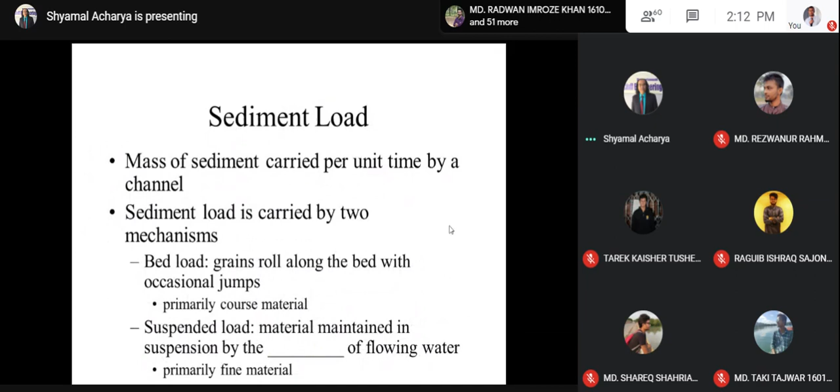Suspended load consists of clay particles or finer materials maintained in suspension by the eddies of flowing water, the eddy current of flowing water. You might know about this term, eddy current. Suspended load is sediment suspended by fluid turbulence, remaining in suspension due to fluid turbulence.

Concentration can be substantial in cases of high flows and fine sediment, up to 60% by weight. This relates to the vertical distribution of sediment.

Where you can see most of the sedimentation in flowing water through irrigation canals: there is higher concentration near the bottom of the canal. Coarse fraction concentration decreases rapidly above the bed, while fine fraction concentration remains more or less uniform from the bottom to the top of the water. Fine fractions remain more or less uniform, but coarse fractions remain much more concentrated at the bottom of the canal, decreasing rapidly as you go upward.

There is no theory for concentration at the interface with the bed. Given sediment concentration at one elevation above the bed, it is possible to derive sediment concentration as a function of depth.

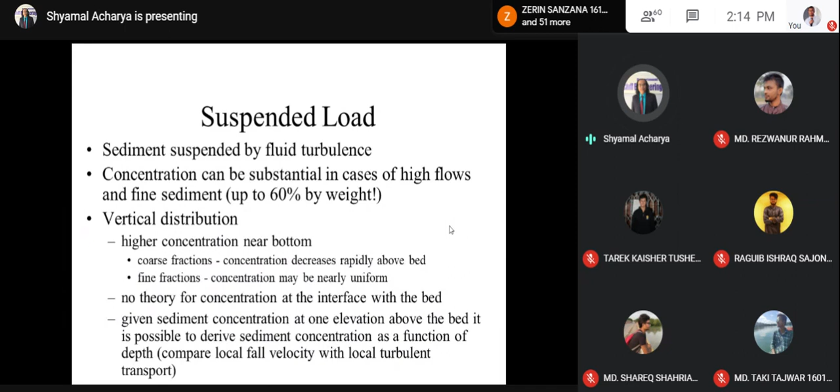So you can consider sediment concentration depending on the elevation, and derive a sediment concentration as a function of depth. So you can say that as depth increases from the surface of the water, concentration will be increasing. You can establish a relationship between these.

Bed load depends on sediment size distribution. The bigger the size of the particle, the more will be on the bed. It also depends on the bed shape, the shape of the channel bed, whether there are ripples or dunes, then sediment density, and also shear stress at the bed.

Many researchers have proposed bed load equations, but each equation only applies to the data that was used to obtain it. So you can find many equations, but not all are applicable to all types. For a particular category, you use a particular equation. So you may depend on an equation, but you need to be careful about the channel characteristics and what type of experiment the equation was obtained from. You need to use those carefully.

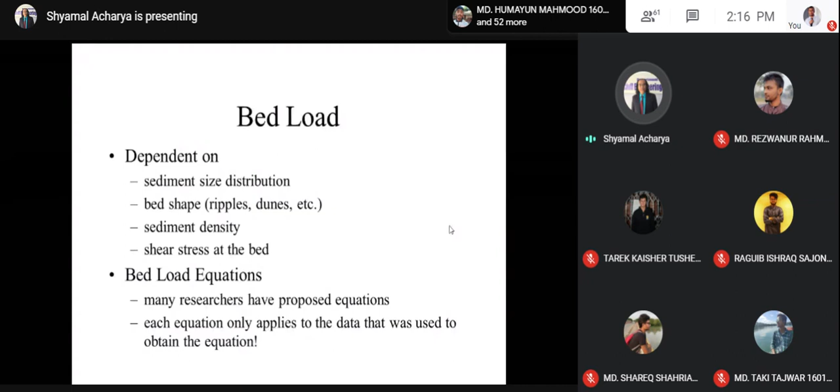Bed formation: a variety of bed forms are possible.

Bed forms could be different types. They may be three-dimensional, and may vary greatly across the river or in the direction of flow. For a river, bed formation can change quickly, but in irrigation canals or smaller canals, it may remain more or less the same, depending on the Froude number and affect roughness.

Bed forms result from scour and deposition. Whatever the bed is available today, after few days or some time, the bed formation may not remain the same. Depending on the water flow and its characteristics, there may be scour and there may be deposition, and by that way bed forms are susceptible to change from time to time.

Deposition occurs over the crest and scour occurs in the trough.

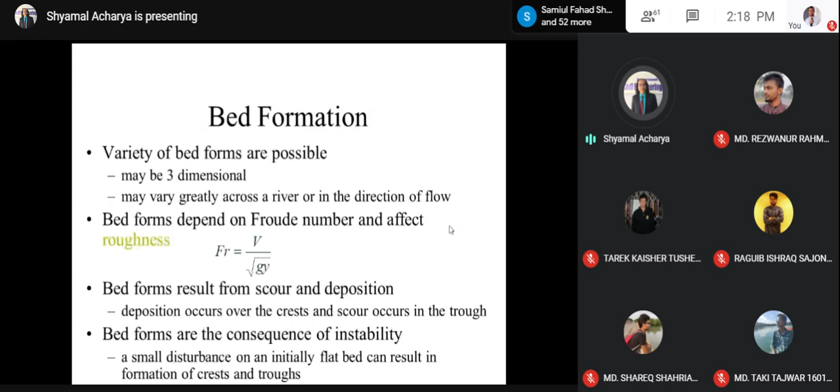Bed forms are the consequence of instability. A small disturbance on an initially flat bed can result in formation of crest and trough. So if there is any type of disturbance because of high flow velocity, because of any other formation, because of any obstruction, the bed, if initially flat, may change into crests and troughs, and ultimately there are possibilities of having some ripples and dunes there.

So just to know about the bed forms: the blue color is the water, and the bottom, smaller dotted areas are the sandy formation of the bed. Low velocity, fine sediment, sand wave moves downstream, wavelength less than 15 centimeters - those are the ripples.

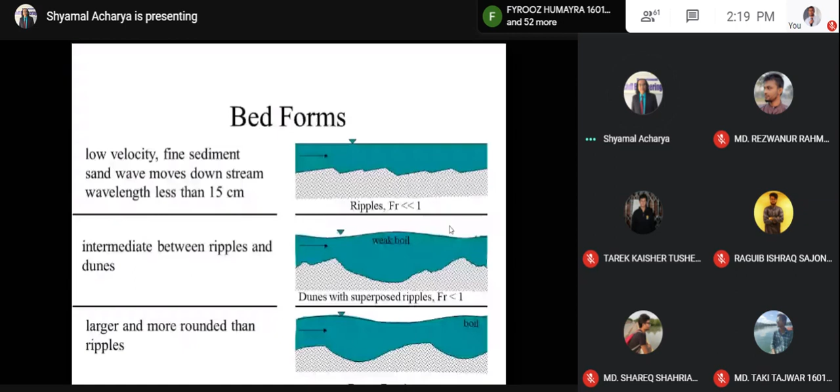But intermediate between ripples and dunes, there are possibilities of having huge dunes, larger and more rounded than ripples. So a perfect dune you can see at the bottom, and at the surface of the water you can see the longer waves of the water flowing. So the top surface of water is also not stable - it is having some wavy patterns.

Dunes are eroded at a Froude number close to 1. No reduction in friction factor or Manning's n - it will remain more or less equal.

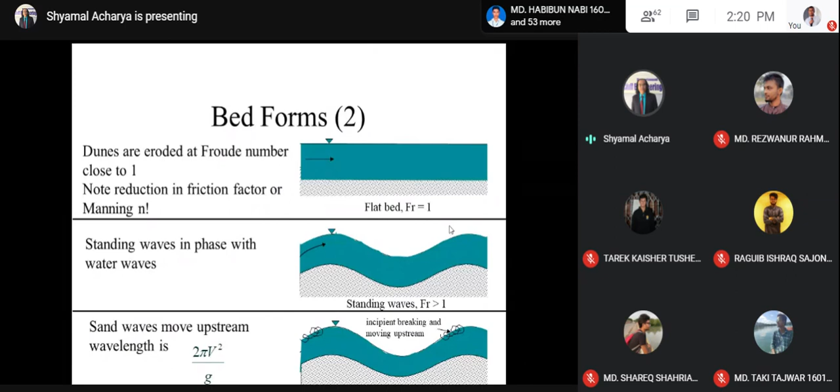And if more waves are coming, in that case there are standing waves in phase with the water waves. Formation of the channel bed will occur in accordance with the water wave, and there will be more swirling on the surface of the water ribbon. Sand waves move upstream with wavelengths having some incipient breaking - those are called the swirlings.

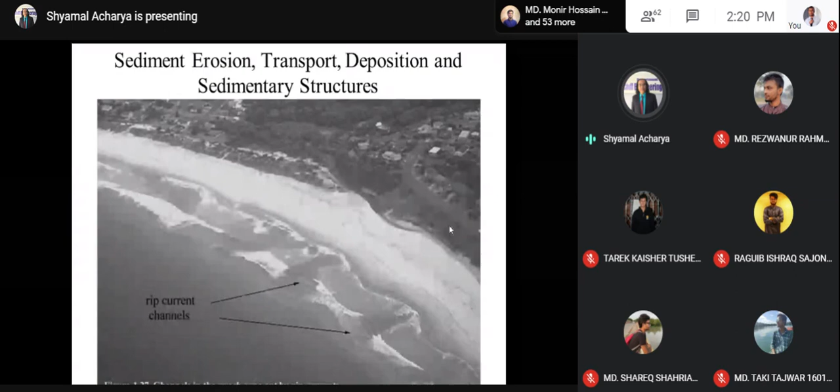Rip current, channels - and we will be coming to know about how erosion, transportation, deposition, and the formation of sedimentary structures occur. Sedimentary cycle: how sedimentation is created and finally goes up to deposition. In between, there will be erosion and transportation. Because of weathering activities, particles will be tracked up.

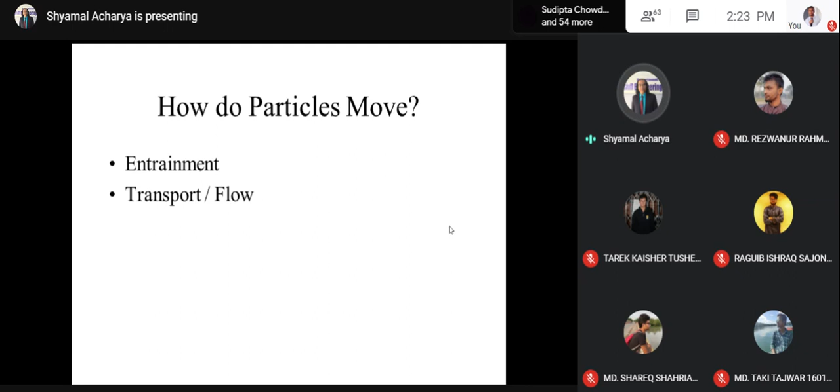In which fashion do particles normally move? Either by entrainment or by transport or flow. The particle moves in downstream direction either by entrainment way or by transport or flow way.

Basic forces acting on a particle - what are the forces acting on a particle? Because of those, the particles are moving in downstream direction. Those forces are basically gravity force, drag force, and lift force. Gravity is attraction towards the center of the earth. Drag is a measure of friction between water and the bottom of the water channel or particles. Lift force is caused by Bernoulli's effect and eddy current or some other way, and those are the forces responsible for the movement of particle by entrainment.

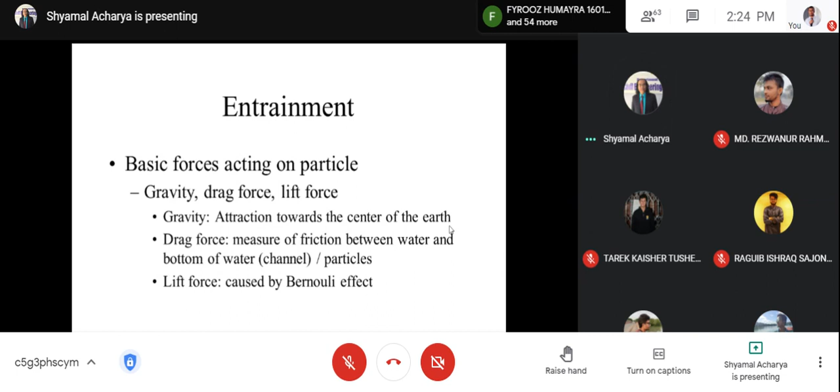You know Bernoulli's equation - three types of energies remain constant at different sections of a river or flowing channel: potential energy, kinetic energy, and pressure energy. Pressure on the grain decreases, creating lift force. Faster current increases the likelihood that gravity, lift, and drag will be positive, and the grain will be picked up, ready to be carried away.

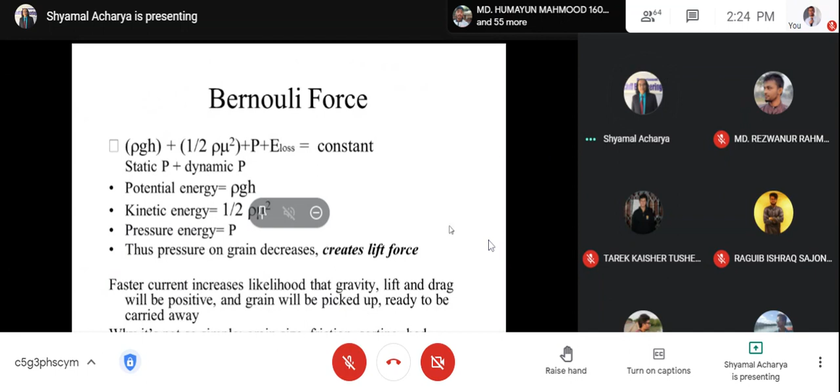Grain size, friction, sorting, bed roughness, electrostatic attraction, cohesion, and because of all those, this movement is not so simple or so easy. As you can see, these types of forces are affecting the particles while they are about to move.

Lift component, Bernoulli's effect, and because of these Bernoulli effects, there could be eddy currents and other energy, potential energy, kinetic energy, and because of this lift component created by the direction of flow, there could be the gravitational attraction on the particle and a lift. It is against the gravitational acceleration, and there may be some other dragging force that reduces the flow of the particle because of the water pressure and because of the friction on the bottom surface of a river or a channel.

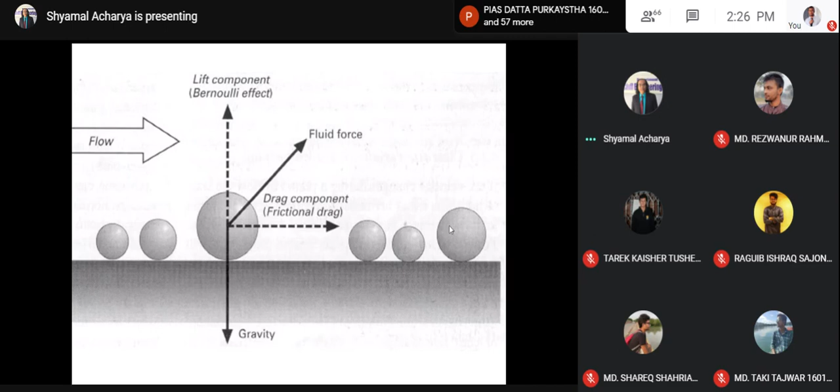So ultimately, whichever one wins, the particle will behave accordingly: whether it will be at rest, whether it will be moving while remaining on the bed, or whether the particle will remain in suspension and move downstream. As you know, the types of flow are laminar and turbulent. In turbulent flow, you can see particles everywhere, and flow lines change constantly, instantly, all the time because of these eddies or swirls.

Why laminar and turbulent? Why are the flows different types? Because of flow velocity, because of the bed roughness, because of the type of fluid. If the fluid type changes, then the type of flow could also change. Because of flow velocity, we can differentiate the type of flow, whether it is laminar or turbulent. And depending on the bed roughness, what type of flow will be there

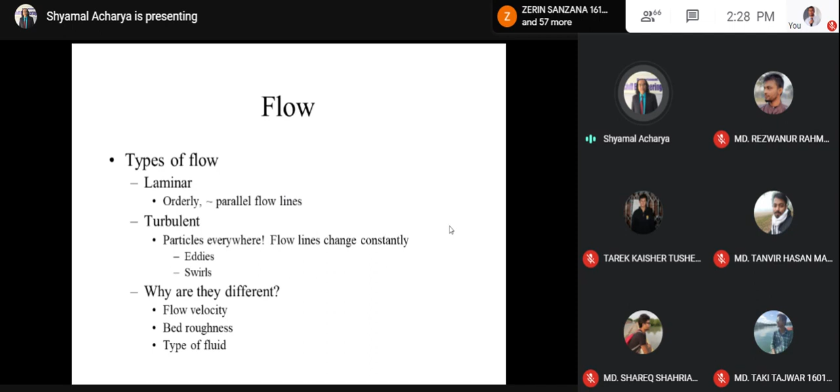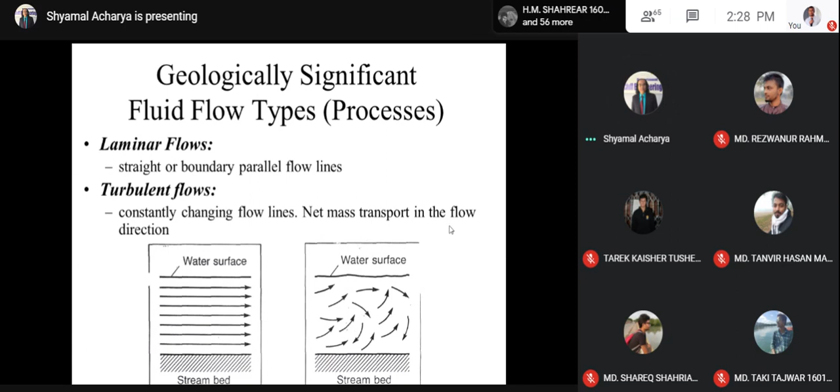could be decided. In the geologically significant fluid flow types and processes: laminar flow and turbulent flow. In laminar flow you can see straight, boundary-parallel flow lines. But in turbulent flow the flow lines are constantly changing. Net mass transport in the flow direction. For each particle, the flow direction could be different, not necessarily in the direction of total movement of the fluid. It could be in any direction.

A fight between inertial and viscous forces. If the water wins these fights, then there will ultimately be flow. Otherwise, stoppage of flow. Inertial and viscous force: an object in motion tends to remain in motion, then something stops it, that is viscous. Slight perturbation in path can have a huge effect, and perfectly straight flow lines are rare. Perturbations, I am not sure whether you know this term or not. The smaller roughness could be called the perturbation.

Viscous force: the object flows in laminar fashion. Because of the viscosity, any object in the flow is liable to move in laminar fashion. Viscosity is resistance to flow. A viscous fluid uses so much energy to move, it's more efficient to resist, so flow is generally straight. Low viscosity, like air, is very easy to flow, harder to resist, so flow is turbulent. So more viscous fluids basically remain in laminar flow condition, low viscous fluids remain turbulent.

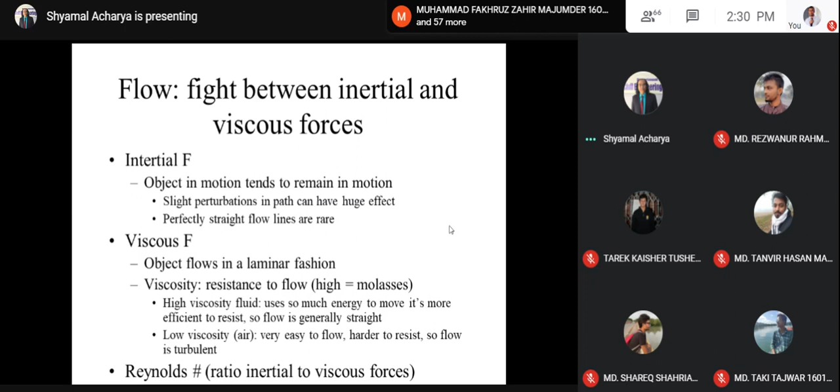Reynolds number, VL divided by nu, where nu equals mu by rho, the kinematic viscosity. You know this equation. Fluids with low nu are turbulent. The change to turbulent is determined experimentally, as we know. Less than 500 is completely and purely laminar flow, and more than 2000 is completely turbulent flow. In between, any type of situation you can see, depending on the segments of flow in the direction of liquid flow. It is flowing like laminar, but sometimes there could be some turbulence effect also.

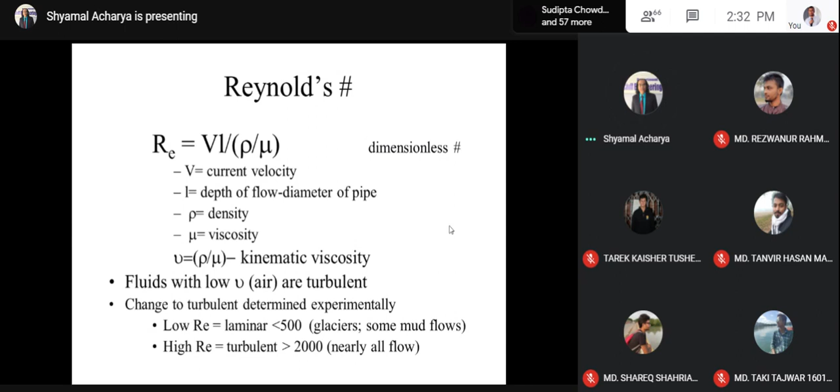So this is more or less a complex situation. So a Reynolds number less than 500 can be said to be completely laminar flow, and more than 2000 completely turbulent; in between is a transitional range. Sometimes it may be laminar, sometimes turbulent.

What else impacts fluid flow? Channels, water depth, and smoothness of the channel surface impact it. Channels of different types: channel type, channel bed, channel roughness, channel width, channel shape, channel situation. All those could impact fluid flow. Water depth can also impact fluid flow. Smoothness of channel surfaces can affect fluid flow. Roughness or smoothness of the channel surface could change the flow from turbulent to laminar or laminar to turbulent, and whether there is any viscous sublayer.

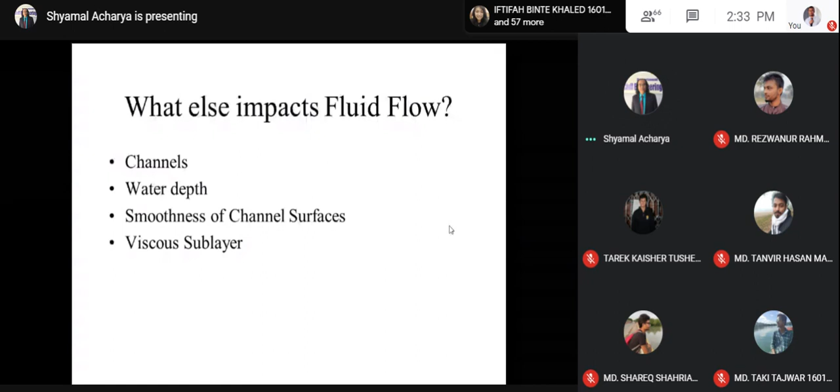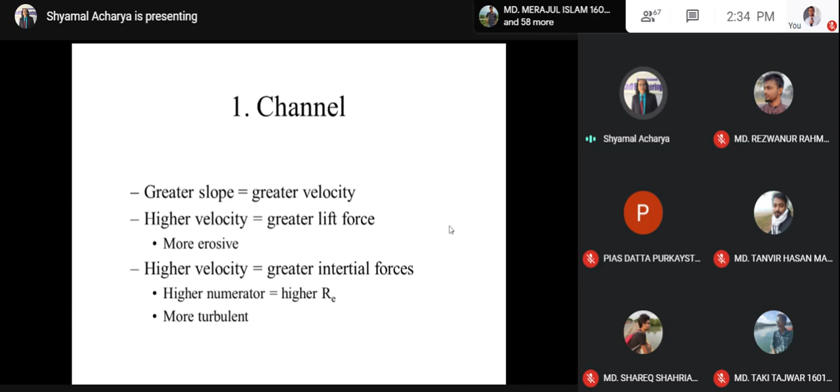Channel. If the channel bed has a greater slope, there could be a greater velocity in the water, so ultimately a possibility of turbulent flow in the channel. Higher velocity will give you a greater lift force. So a greater slope gives high velocity and more chances to be erosive. Greater inertial forces, so a higher Reynolds number, and it could be more turbulent. Water flowing over the bottom creates shear stress, ultimately trying to retard the flow.

Shear stress will be highest at the contact surface and decreases as it moves upward from the channel bed. Velocity is lowest at the contact surface and increases up. Velocity of the water flow is very low at the contact surface of the channel bed, but if you move upward from the channel bed, you can see that the velocity of water is increasing.

Depth over which friction creates a velocity gradient: in shallow water, the entire flow can fall within this interval, and in deep water only the flow near the bed level is retarded. In the case of deep water, the flow velocity more or less remains the same in the total cross-sectional area, but at the bottom level, the flow velocity is bed-level restricted.

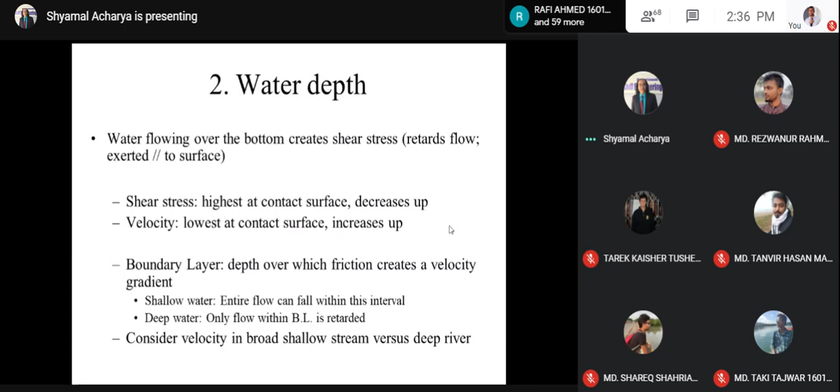Water depth, boundary shear stress: stress that opposes motion of fluid at the bed surface. So from there you will see a particular type of curve. You can see how they will retard the water flow, or their characteristics. The resistance to fluid flow across the bed, the ability of fluid to erode or transport sediment.

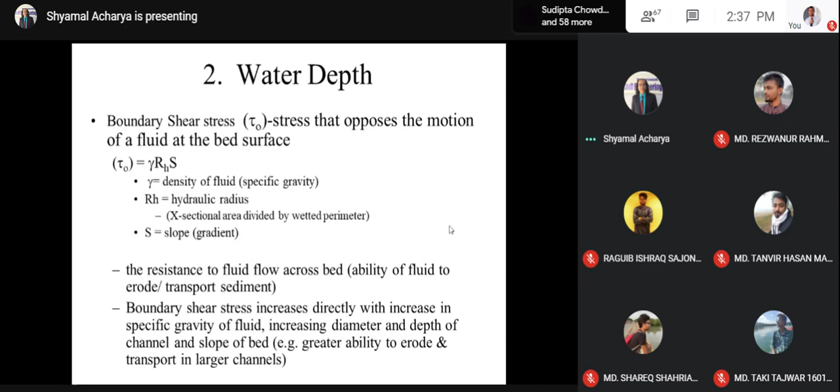Boundary shear stress increases directly with the increase in the specific gravity of fluid, increasing diameter and depth of channel, and slope of bed. So depending on these factors, boundary shear stresses could be increased or decreased. Turbulence moves higher velocity particles closer to the stream bed or channel side, increases drag and lift, and thus erosion.

Turbulence in this flow applies to stream channel walls, not just the bed. This is actually the same as what we discussed in Kennedy's theory and Lacey's theory. Kennedy's theory says that the resistance is applicable only to the channel bed. But in Lacey's theory, it is said that it is not only the channel bed, but also the channel wall. So this is very much similar to Lacey's theory.

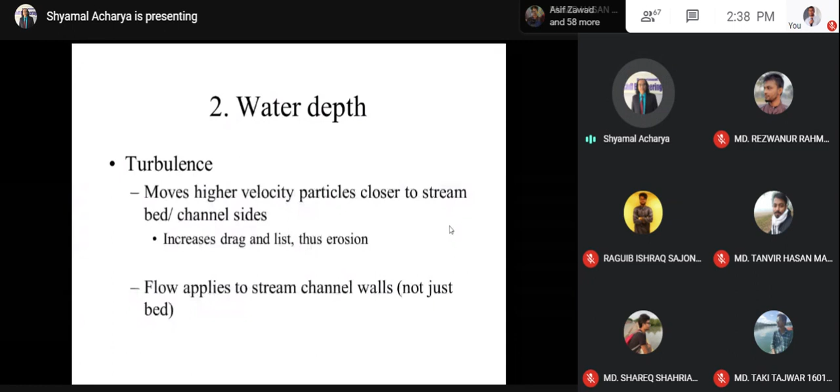Smoothness of the channel bed: whether there will be any obstruction or the water will move smoothly. If there is any obstruction, that will decrease velocity around the object. So if a bigger particle or a bigger stone is there at the channel bed, around that, velocity will decrease, and there it will create the possibility of turbulence.

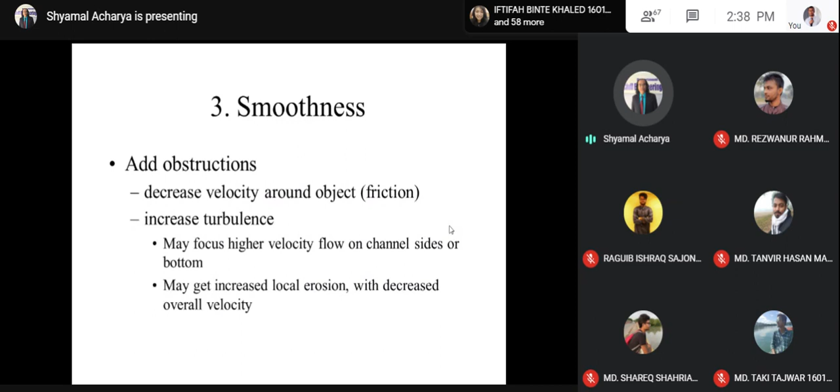Viscous sublayer. At the surface, there is a molecular attraction that causes flow to slow down. So whenever you see the flow profile of a channel, at the surface of the river or channel, the flow is less than in the middle of the channel or river. The flow velocity at the surface of the river and at the bottom of the river is less, and the flow profile is like a curve,

a U-shaped curve. So at the surface of the river or channel, the velocity of water is less. Also at the bottom of the river, because of the shear stress retardation, the velocity of water is very less. But at middle depth, the maximum water flow can be attained at 0.8 from the bed of the channel, 0.75 to 0.8 of the total depth of water.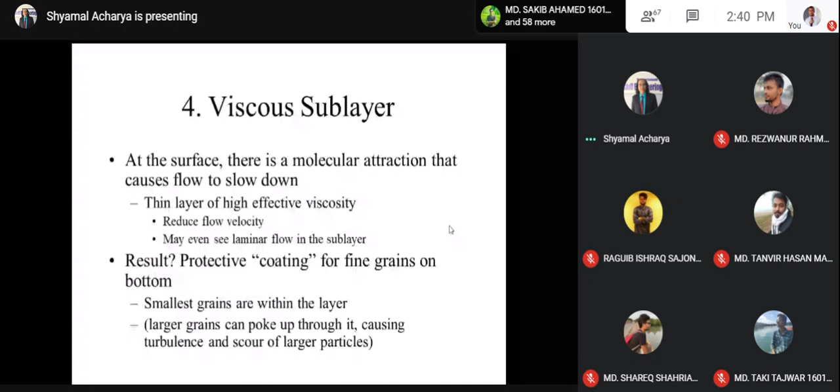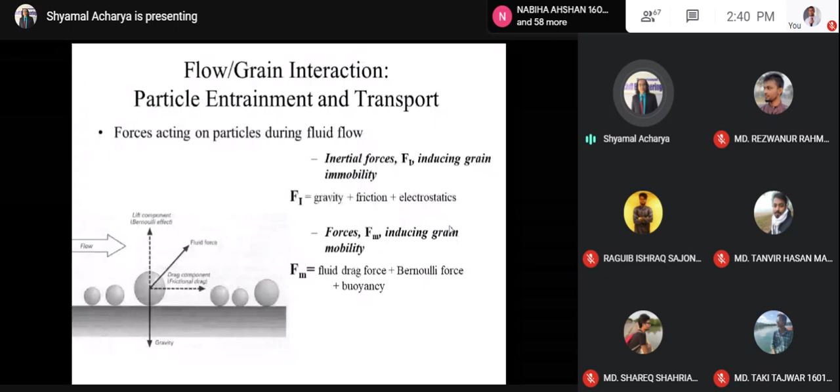As you have seen, entrainment and transport forces acting on particles. You have seen this picture earlier. Inertial forces, that is because of the flow, and forces inducing grain immobility, FI: gravity, friction, and electrostatics, and FM: fluid drag force, Bernoulli force, and buoyancy. Those are restricting the flow. And ultimately, if Fm is greater, then flow will continue.

Deposition occurs when the system can no longer support grains, and at that time particles settle. Particles settle due to the interaction of upwardly directed forces and downwardly directed forces. Upwardly directed forces, as you know, are buoyancy force, drag force, or Bernoulli forces. If these upwardly directed forces are less than the gravity force, then all the particles will gradually settle down.

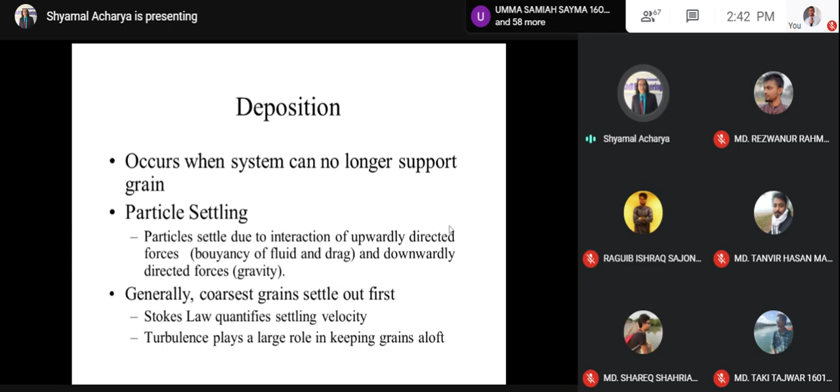Generally, coarser grains settle out first, following Stokes' law. I think you might know about Stokes' law. A free-falling particle will lose some of its velocity because of friction or drag force, but with a uniform velocity, it will move downward and ultimately reach the channel bed. Turbulence plays a large role in keeping grains aloft. If there is no turbulence, then deposition will occur.

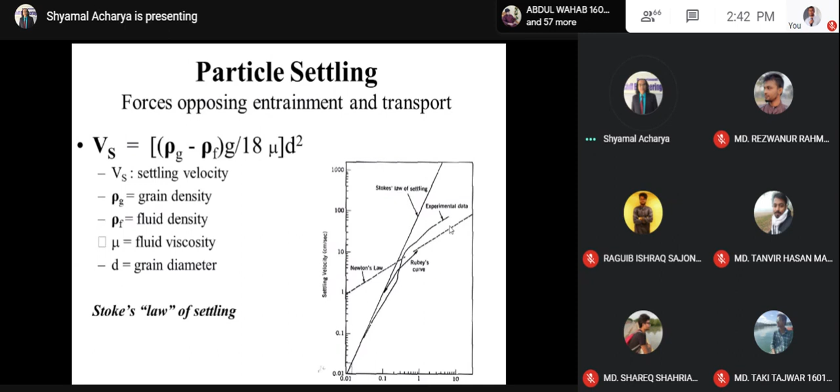Particle settling, you know this equation. This is called Stokes' law, and following this one, ultimately the particle will settle, or it will guide whether the particle will remain in suspension. Increased velocity, increased turbulence, and entrainment. Material also plays a role.

Hjulström curves, you can see this one. This is the empirical measure of the minimum velocity required to move particles of different sizes. You can see this curve. Hjulström curves show, depending on different situations, the minimum velocities for a particular diameter. This curve will guide you whether the particle will remain in suspension or whether it will settle down or not.

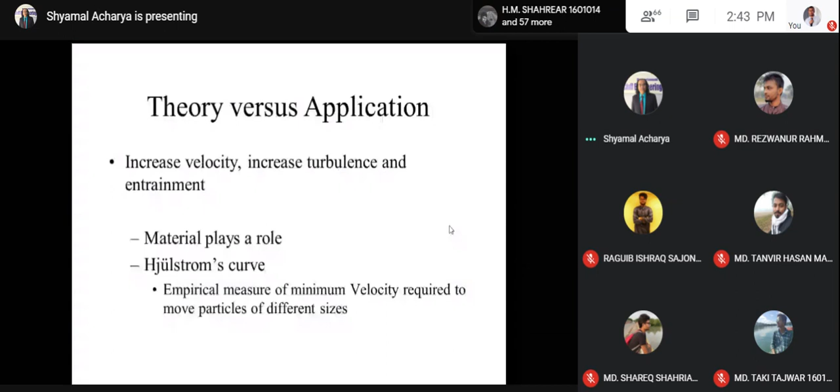This curve is basically formed in an empirical way after a series of experiments. From those experiments, taking the data, this curve is formed. A series of grain sizes in a straight-sided channel, with velocity increased until the grains move.

In the experiment, there are different sizes of particles in the water flow, and the velocity is gradually increased until the particles start moving. And from those experiments, this curve is created.

Threshold velocity to entrain particles, transition zone, specifics like packing, and intuitive except for clay cohesion, electrostatic attraction, and viscous sublayer. These commonly remain in suspension because they are very small particles.

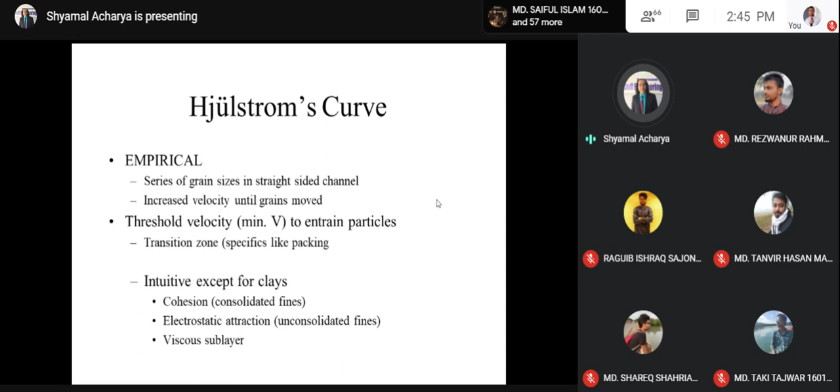But for the larger particles or sandy particles, this Hjulström curve is basically helping you find the minimum velocity for a particle to enter into entrainment or movement. This is basically called the Hjulström diagram.

As you can see at the bottom, there are names of different types of particles: clay, silt, sand. In the sand, you can see different types of sand: very fine, medium, coarse, very coarse. And then come the pebbles and cobbles.

And understand what the size range is for clay, what the size range is for silt, what the size range is for sand, and then the pebbles and cobbles are even more than 100 diameter. Okay, and you can see velocity in the channel or in the river.

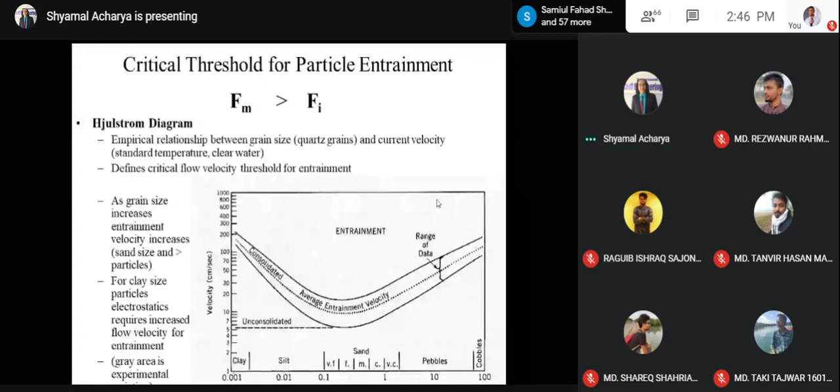Here you can see which size particle will remain in which condition: either entrainment, or in suspension, or consolidated, or settled down. Grains in motion: once the object is set in motion, it will stay in motion.

Transport paths. Transport paths could be of different types. The transport path could be traction, could be saltation, as the bed load or as the suspended load. Grains can shift pathway depending on conditions.

So a particle following traction will not remain in traction all the time. A particle moving as bed load will not always remain in the bed load condition. Depending on the conditions, the transport path could be shifted. So what is traction? Traction is basically the grains rolling or sliding across the bottom.

What is saltation? Whenever the grains are hopping or bouncing along the bottom. I think you know the hop, small jumps, hopping like the frog. The small jumps, this is called saltation. And bed load is basically a combination of traction and saltation. A bed load sometimes could be in traction and sometimes in saltation.